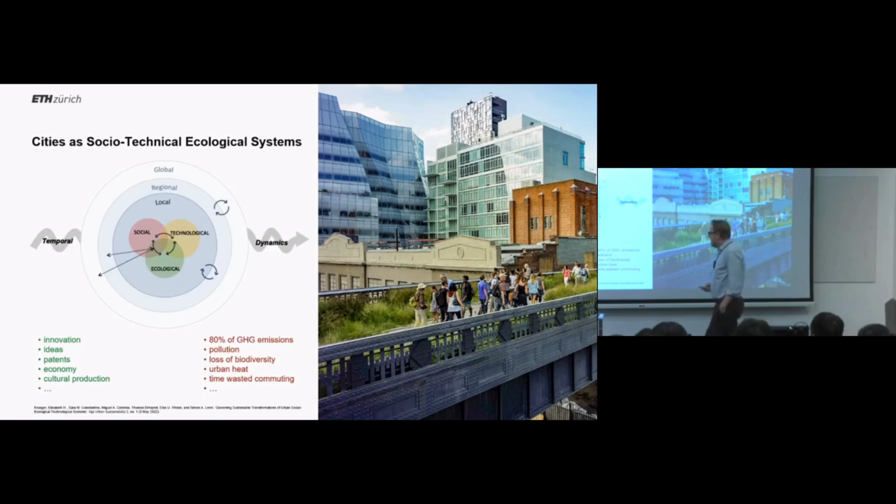NUS Cities has been pioneering research and discussion about complex cities as complex systems. Of course, if you look at urban science and complex systems research, we have learned that cities have very interesting, very positive traits. Cities boost innovation, they boost ideas, the number of patents, the economy, the cultural dimension. This is all something that is scaling extraordinarily in cities. We know that, and this is why cities are so exciting.

But we also know, maybe a little less, but we have to face it, the negative effects of cities. That is, of course, that also 80% of global greenhouse gas emissions are somewhat associated with urban regions. We have the issue of pollution that, despite our collective perception, is the number one source of artificial deaths on this globe. We have the question of loss of biodiversity. We have urban heat, which is pronounced by cities and their buildings, and time wasted commuting when we choose organizational forms that are very heavy on transportation and mobility.

So everything would be great if we just stop at the left side, but we also have to face the right side, and I think that makes it interesting. How can we think of cities where we keep the left side and even boost it, but not only mitigate the right side, not only make things less worse, but ideally create cities that in the future are maybe positive, even better than the surroundings, and that actually contribute to health, to well-being, and livability. This is kind of the frame I want to set with my talk today.

And it's not moving.

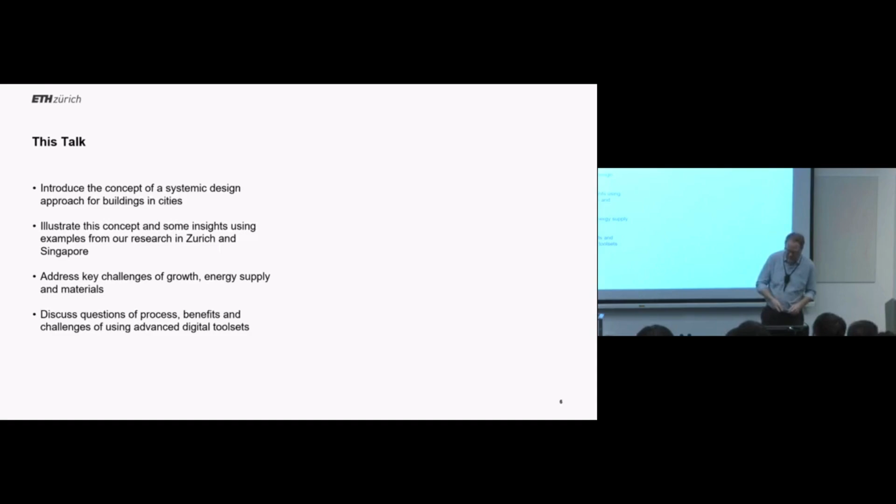So the key question for our research: how do we integrate different interacting domains in urban contexts to achieve a more holistic perspective? How do we generate and derive knowledge through science and evidence through application? How can this be used to design future cities that are not only less bad, but positive? That means hopefully better than the surroundings.

So our lens on this challenge hinges on 3 points. The first one, of course, we're all aware climate change is happening. This is no news, and we're all in the same picture. Most of you probably also know the contribution of buildings to this question.

Almost 40% of global greenhouse gas emissions are somewhat associated to buildings. What is interesting is that it can be distinguished between direct and indirect emissions through power consumption and maybe combustion in buildings themselves, but also in terms of material and resource consumption. So it is fair to say that buildings make the biggest part of global greenhouse gas emissions, and this is why we need to act.

So one goal definitely for us all needs to be to move towards low or even zero total carbon buildings, and I will later show an approach how we might go in this direction.

A second, similarly important, and in the past years due to the geopolitical crisis even somewhat more challenging point, is the question of facilitating the energy transition. Our society needs to change into renewable energy generation. It's quite interesting — this is the image of the Swiss Confederation, the plan until 2050.

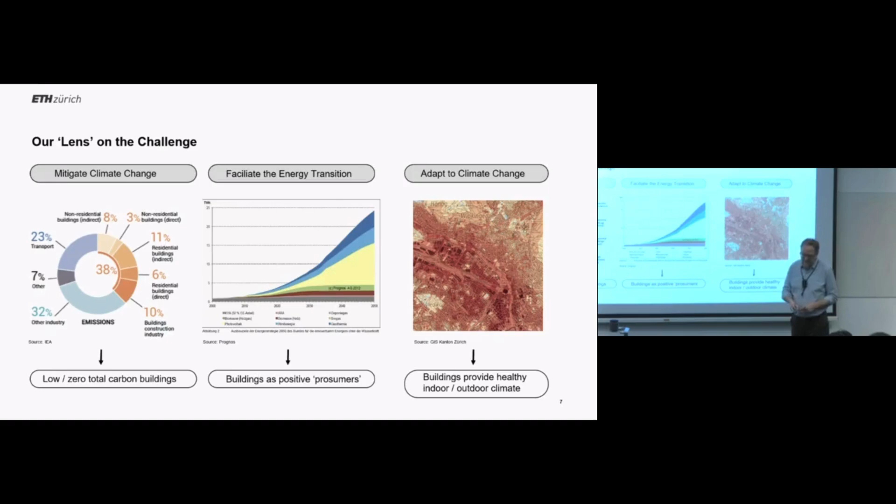What also makes it very interesting, and I believe we have a lot of architects in the room, when we started this topic, we tried to frame it and thought, okay, well, it's actually just about multiple buildings, right? It's maybe about a neighborhood.

But then when you start working on this, you see that there are all those interdependencies between the different temporal and spatial scales. So if I started with a building, I can look at it, but of course, immediately questions about the building components rise, and from the components, I have questions about the materials.

And right now, for example, materials research is very active, with new materials coming up. And if we trace the entire chain, we see that this actually trickles up, and I will show you an example how this can trickle up to the city scale, and vice versa.

What is a building? What is the difference between a building and a district and a neighborhood? It's, of course, all the intra and inter-building effects that happen on the district and neighborhood scale: exchange of radiation, shadowing, infrastructures, district cooling, district heating systems.

And then if I scale this up even once more, I end up in the city, and the city, of course, sets all the boundary conditions, the grid, the larger scale infrastructures, which immediately affect this and this level. So it's a tricky question, right?

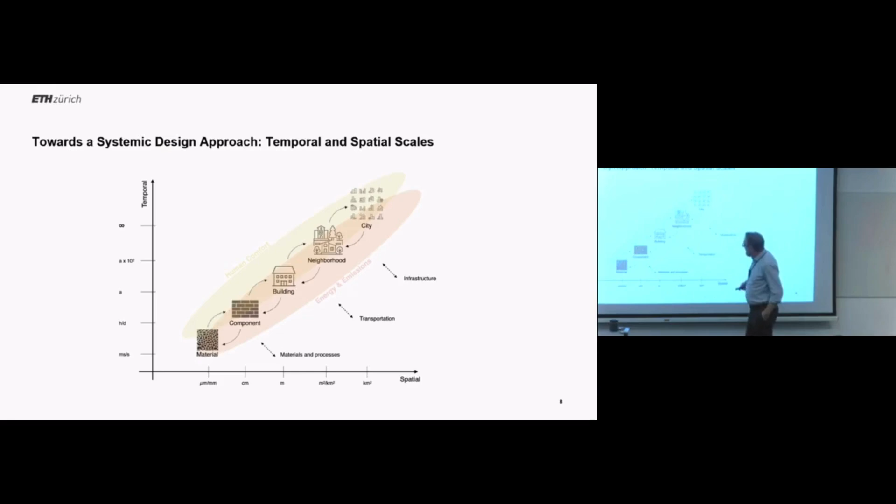It's a tricky question how we combine this in a way of understanding with respect to different spatial scales and temporal scales, as already mentioned initially.

So how are we trying to do this? We try to address both qualitative and quantitative, but I think the novelty is for us to introduce more quantitative means. And this happens by building computational models on top that are multi-scale and multi-domain.

So we try to build basically a selection of models that help us to isolate a question and maybe answer a specific question, or at least have an insight about the mechanics behind it. We all know all models are wrong, but some are helpful, right? As George Box, the statistician, has quoted, and I think that's very true.

For us, this means starting by working with stakeholders, starting to create scenarios. One way to predict the future, we don't know the future, but one way to at least have possible futures is to think about different scenarios. And none of those scenarios will be the future, but the scenarios might span a certain range where there are some elements that could be a potential future.

So it starts with interacting with stakeholders. This can be communities, this can be industry partners, this can be other domain specialists, starting to create the scenarios. And for those scenarios, we, as a next step, then try to gather input data that helps us populate the models that we build.

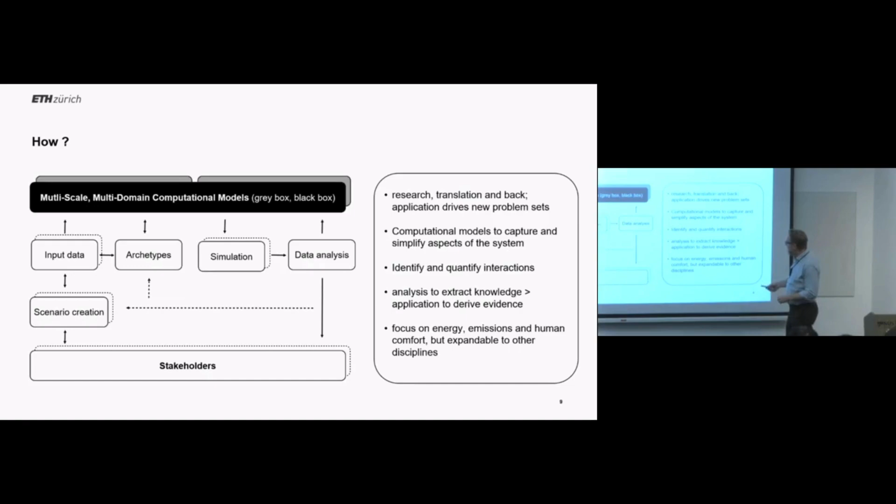As already mentioned, we want to extract knowledge, but then when we apply it, we want to derive evidence. We want to know that it's actually true, and that's quite tricky on an urban scale. Buildings you can measure and monitor, you can somewhat grasp as a system, but larger scale systems are really hard to get the ground truth for. How should we do that? This is an exciting part of research, and we had some interesting discussions today about that. And yeah, that's the specific focus I already talked about.

So, of course, that's the work of many people. I'm standing here and am allowed to tell the story, but there is, of course, a big team behind it. For 10 years, we've also been here in Singapore at the Future Cities Lab, with our collaborators from NUS and NTU, and many people that have been involved in this research are obviously a big part of that.

Good, let's start with the question of growth. A few years ago, there was one of the largest research projects in Switzerland that brought together different entities to think about how Switzerland would develop and how to decarbonize Switzerland. There were a lot of researchers on mechanical and energy systems behind it, but it was very unclear how Switzerland would even develop and what the future energy demand would be. Everyone was developing technologies, but the question was, okay, which type of energy are we talking about and how much do I need? So we started this project assessing the energy demand of future Swiss districts under urban development and climate change.

And that is already something that is essential. It's not only about assessing energy at a certain point in time, it's the question of how it changes. How does it change under urban development, assuming that Switzerland will grow, and under climate change, which is already happening. This is just one example: heat days will be rising in Switzerland too.

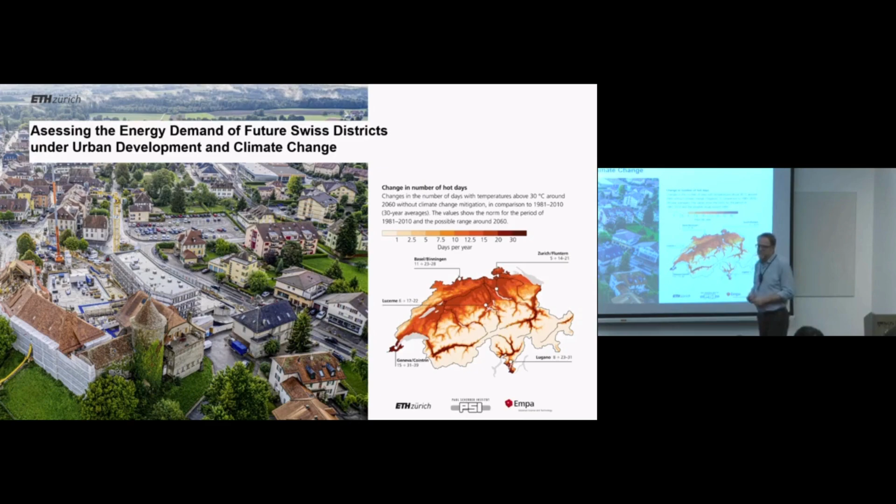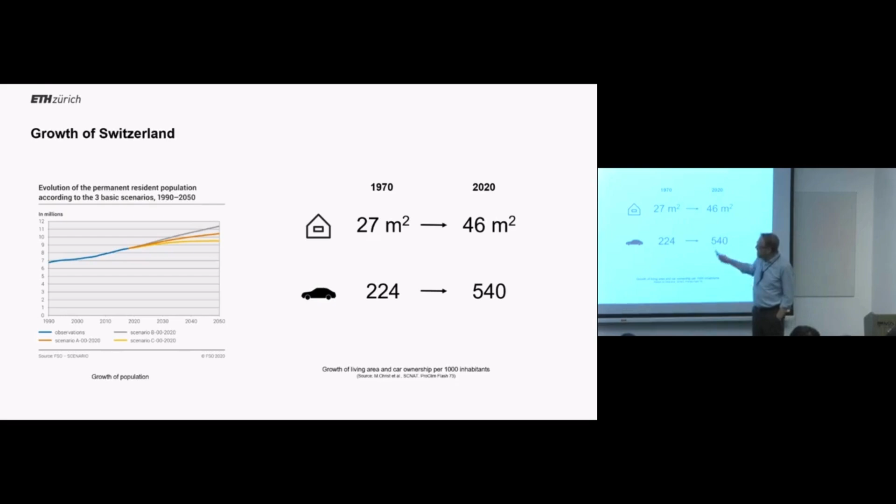But it's not only growth in people, it's also growth in space, right? In 1970, the average Swiss person had 27 square meters of living space. Now we're at 46 - that's almost double already. So each individual person requires an average of 46 square meters to be built. That's quite heavy, and this multiplies the fact that we need to house more people. But also in mobility, in 1970 it was a little bit more than 200 cars per 1,000 people. Now we are above 500 cars per 1,000 people. So all these factors multiply and it becomes essential how we deal with this in the future.

And of course, if you go to Singapore, cooling was always there, right? Buildings always needed to be cooled. And so there's been an adaptation in habits, in people, in building, in technology. But in Switzerland, this is not the case. We have building stock that is very old.

So 65% of residential buildings are older than 40 years. These are all buildings that were built and designed for a very different climate. Now we have this issue that with an increase of cooling and hot days, after a few days the cooling reservoir of the building is depleted, but there's no active cooling systems. So it means that in the future, our entire building stock is not really capable of dealing with the fact that we need cooling all of a sudden. So there's a huge problem.

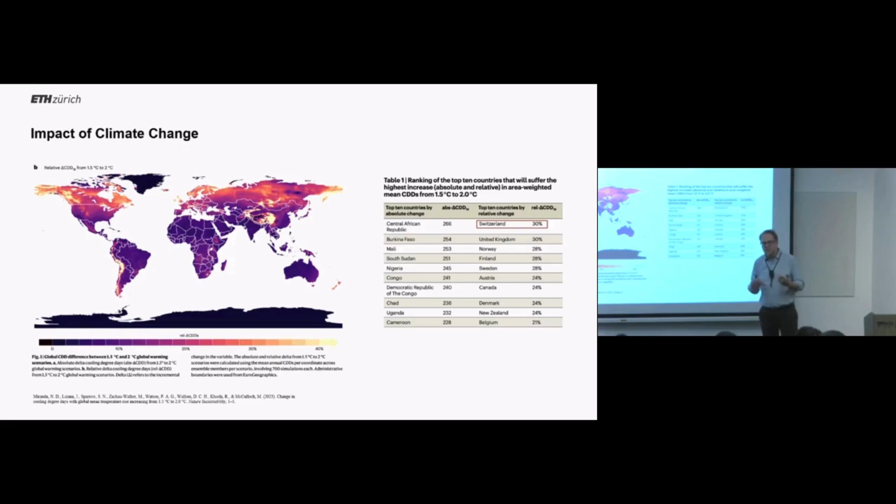How do we deal with cooling in Switzerland? So this is the project we then started. We looked at this idea of an archetype. We didn't just do it on a building level, we did it on a settlement level.

So we looked for representative Swiss archetypes, meaning we were looking for structures that were in their characterization representative of many situations in Switzerland. So here, for example, the urban archetype, that was an easy one. We were already working on Zurich Altstetten, which we have a lot of very good data on. This is the typical mid-dense, mid-rise Swiss city, and that serves really well as an archetype.

Then from the French part, we chose Echallens, which is roughly 1,000 buildings, kind of more a suburban, peri-urban archetype. And then, of course, a rural archetype, Airolo, which is a bigger village, a little bit up in the mountains. So these were our representatives.

And with those 3 communities, we had for 9 months conversations about their development and growth plans. How are they supposed to, and how are they planning for growth? Turns out that they really didn't have an idea. Well, Zurich has a URA, so to say, like in Singapore, called the Amt für Städtebau, which is trying to make plans how to cater for this.

But already in Echallens, they had one person in the community who kind of thought about urban planning. And then, of course, in a village it's all voluntary work, so they had no idea how they would develop. So we had long conversations to come up with certain development plans and development concepts. And this is the entire workflow that is behind it.

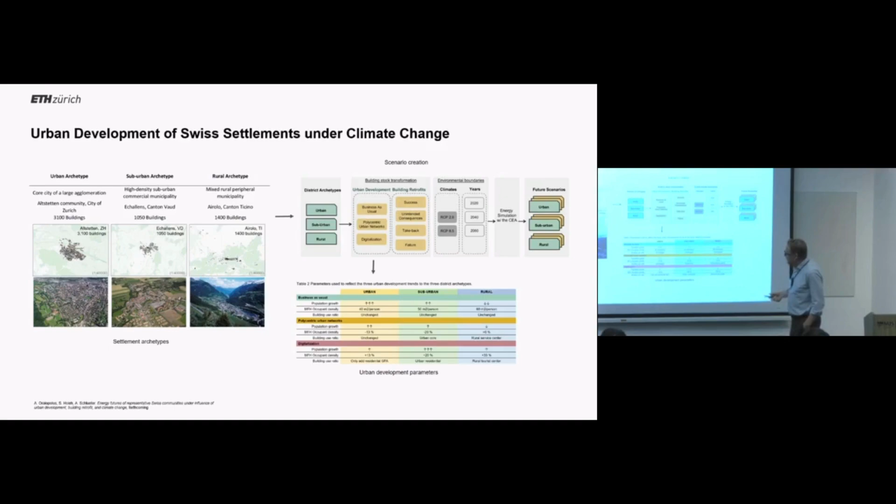And then we looked at this at different temporal scales. And the outcome is then a huge amount of scenarios and simulations, so 16,000 that were run in parallel to see what happens if I look at those different parameters.

Maybe just very quickly on the building retrofits. Of course, the building stock doesn't stay the same, it changes. So how does it change?

There were 4 different retrofit scenarios included, what would happen, and they are all parameterized. So the most important part is the retrofit rate, what percentage of square area would actually be retrofitted with different measures.

And then you see how those pan out in terms of growth of GFA versus population growth over the different years in the different scenarios. So in most scenarios, there's an increase, but it can work very differently.

For example, very clearly in the polycentric urban network, we have very distinct steps how the suburban areas have a much, much bigger increase, versus rural is more on the decline in the classical scenarios as it is right now. Versus then in digitalization, this might flip, and we might even have an increase in GFA there.

This then comes down to different use types. This is this diagram where we see how do the different use types change. On the urban, there's not so much change.

We can see here that in the suburban, there is a bigger share, for example, in office and commercial, because there will be more of this activity. And in the rural, of course, the only thing which actually changes is digitalization, where people would stay in their villages, or even more people would be in the villages, and then they would work there from there.

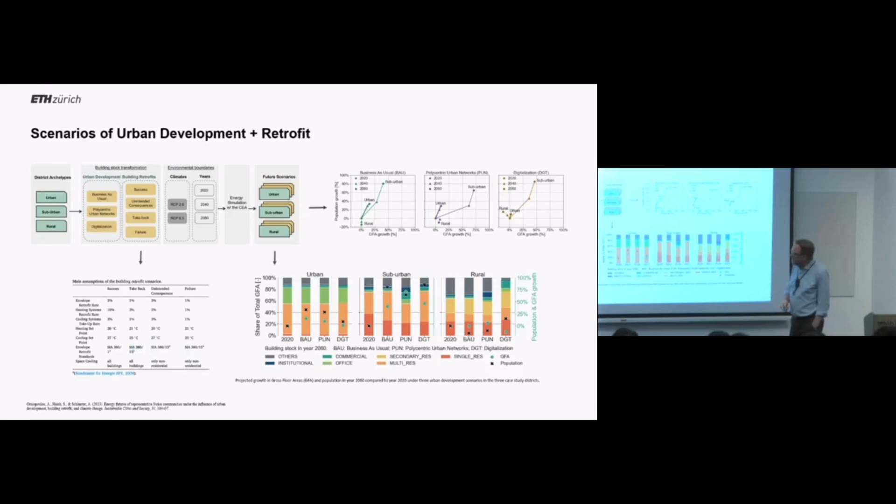So what comes out at the end is the questions of heating and cooling. And what is interesting here is not only the numbers, it's the trends that we see. So I will just quickly highlight those above.

Of course, heating, we see that in most cases we expect that the heating energy will decline. So there's less heating consumed, but it's highly subject to the scenario.

But then again, this entirely flips if you look at the suburban case. So our intuition would tell us, okay, everywhere the heating with climate change, so we need less heat. But of course, in the suburban, that changes due to the fact of a change in building typologies and a growth perspective.

And you see a similar effect in cooling, that you have a very, very dependent on the scenarios, a moderate increase or a very sharp increase in cooling energy demand.

And that tells you that basically if you plan for energy systems or any change in terms of infrastructure, then of course it plays a big, big role which scenario you actually look at. And you might be planning something that is then obsolete or not sufficient at this specific places.

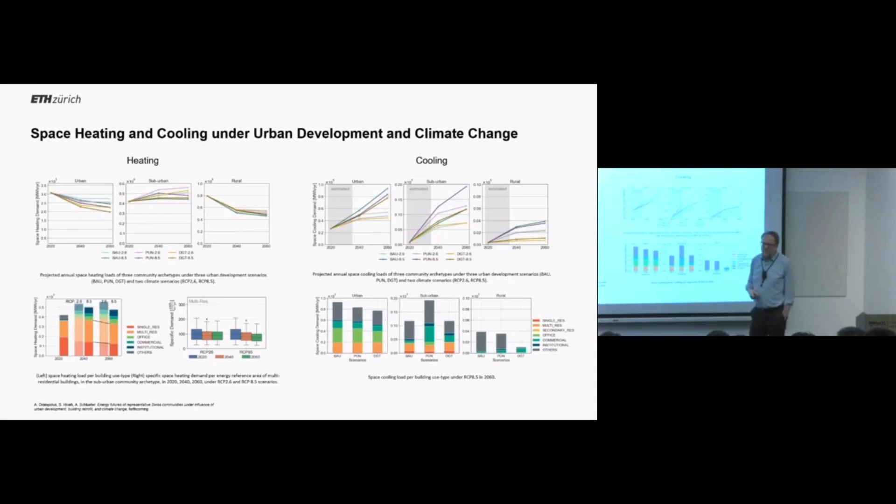We also see the different mix that is then established in the different archetypes and different settlement systems, with the biggest change in suburban. So that's maybe one learning, that the suburban from this is the point where things need to be much more detailed and much more specific.

And this is, if I would need to combine and collect the insights from this, urban areas face a rising demand for space cooling because of retrofit and climate change. And this is interesting, potentially matching space heating demand in 2060. So we're actually for the first time on the same level, heating and cooling.

Suburban areas exhibit a high variability, and this variability and the growth in floor space might have a negative feedback on energy saving and retrofit measures with a high planning uncertainty. Rural areas, rural communities are more stable.

It is actually the biggest driver on the different factors, and especially on the cooling energy demand, is the non-residential buildings. That's also an interesting insight for us.

What was most worrying is that the current slow pace of retrofitting and replacement of heating and cooling systems per se is insufficient to reach the energy targets that Switzerland has set for itself. And this you can see from just looking at those three archetypes.

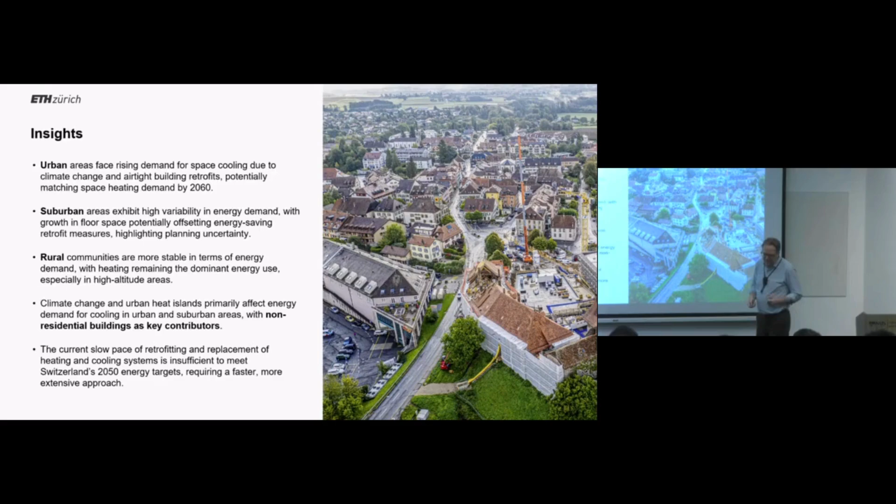So a second very different case study in a very different context was in Navi Mumbai, but also with respect to the question of growth.

The main question here was, can we scale up, can we utilize these methods in a very different context, where we don't have all this fantastic data, where the stakeholders and systems work very differently? So if we do this fantastic research, is this only applicable to first world, high finance, high data availability contexts, or could this be applied essentially anywhere? This was the question here.

For this, we teamed up with a local team: Assistant Professor Chirag Deb at IIT, who's actually an NUS graduate and worked in my group in Zurich before becoming assistant professor there. Together with local stakeholders, CIDCO, the City and Industrial Development Corporation of Maharashtra, the state where Navi Mumbai is located, we selected this area as an example, asking would we be able to project the development and different development trajectories of this area.

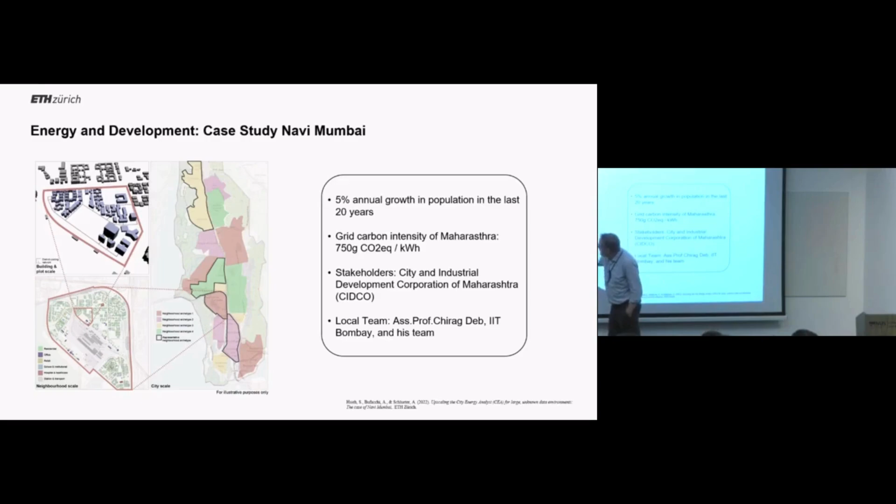This is where we cut it out. This is one section of Navi Mumbai, and this is the closer district. We took this smaller district as an example to model. The whole idea was, would we even gather enough input data, and could we even have a stakeholder-driven process in this? So this was the team.

It worked for the first time with a remote team. Three people up here were the remote team, basically giving support and training, and those were the people on the ground: Chirag and his 2 students, a PhD and a master's student. Within 3 months, the aim was to come to actionable information where local stakeholders could actually take decisions.

Very sporty, but the idea was that there's a remote team that trains the local students who act as change agents that help understand the situation. If we would go to Navi Mumbai ourselves, it would take us a year to understand what is even happening. Those people are very knowledgeable, so we would train them in using this tool set.

This is the City Energy Analyst, one of our tools. I'll tell a bit more about that later. They would get training in this environment, start gathering data, consult owners, developers and stakeholders, then pitch this and discuss it with the municipality, and ideally infuse this information into their design and development process, which happened to a certain degree, on different levels of control, let's put it that way.

The idea behind that is we issued the CEA as a digital public good, an initiative by the United Nations stating that there are digital goods that should be available for everyone. It's an open source tool, so this was basically our first tryout to see what would happen if we did that.

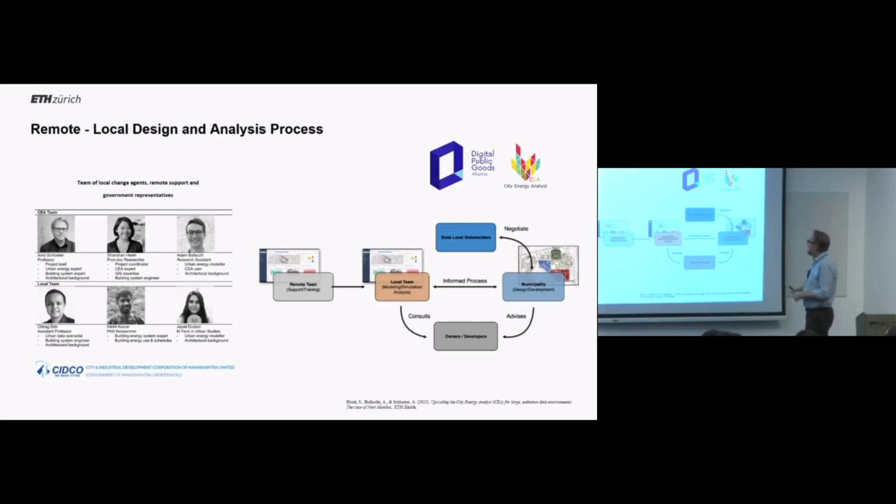It's quite interesting, I mentioned before, if you want to do this, you need data. If you don't have data, you cannot model anything. Even though we have a pretty lean system, we only knew this part, we knew Switzerland. Switzerland is very convenient, you have a lot of data on urban aspects from the government, it's all publicly available. Then you have open source like OpenStreetMap, construction databases, and all those label and certification systems that give you this data. So this is all nice, our data world is nice in Switzerland.

The question was, what would happen if I took this into a data scarce environment? Could I even utilize these tools? So the first 6 weeks, the 2 students looked intensely into the different data, and they were able to uncover quite a bit, which was really interesting.

There's still OpenStreetMap, for example, which is open source data, but there are also different regulations and adjacent research. But there also remained black data gaps where we were not able to obtain sufficient information, and we had to take educated assumptions on how we put this into the models. Overall we were very positively surprised, we thought it's data scarce, but it's actually not data scarce, it's data diverse. You have just a lot of different data and need to search a little more, but there's actually quite a bit around, even for Navi Mumbai.

So in 6 weeks they gathered this data and ran different simulations for the city quad in Navi Mumbai, and the first thing they tested was a kind of benchmarking: are the buildings we're looking at actually within the larger research and measurements of Navi Mumbai? That was good, we had quite a good fit overall, except the high-income residential, which was way above what we expected. That's because there are some buildings that are very luxurious, even going higher than originally intended, so there were some glitches in the planning that happened.

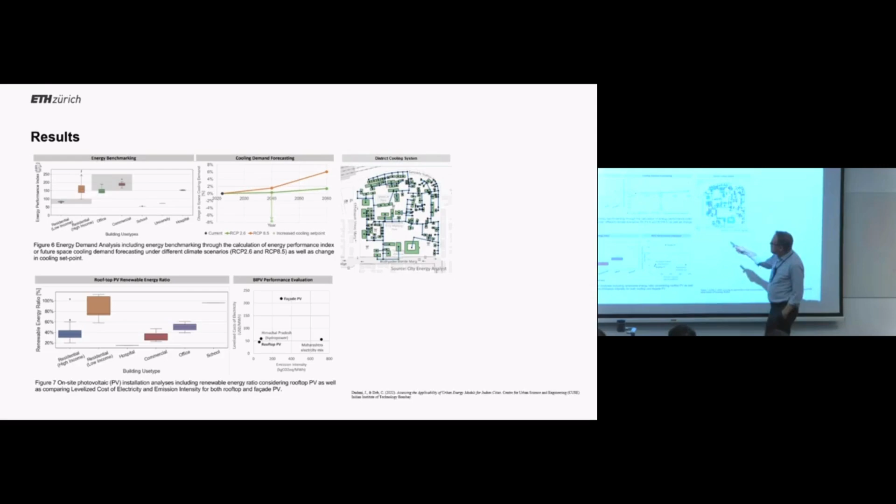Here you see the electricity grid at 750, and you see this is where rooftop PV is, somewhat around 55 to 60. Even in both emissions and costs, it's actually something that would be cost competitive over the lifetime - if you think about 25 years of using solar. If you do this on a facade, which we also investigated, then this is not very cost competitive, obviously, in this surrounding. But there is a huge potential already now to decarbonize by renewable energy in this system as we have it right now.

So what was the learning for us? Yes, you can do those things also with scarce and diverse data. It's a more effort to compile data sets to actually do that. This idea of local stakeholders as change agents was very interesting.

We've now replicated this idea to Brazil. Next week, there will be a master student who has a dual appointment as a student and working in local government, and she's doing the same exercise for two cities in Brazil. So this idea of having knowledgeable experts in this environment as change agents seems to be a way this could actually be spread. It doesn't influence data availability, it doesn't necessarily influence the approach - the whole UBEM, urban building energy modeling approach - but it's a question of scale, maybe, and the difference in models you choose.

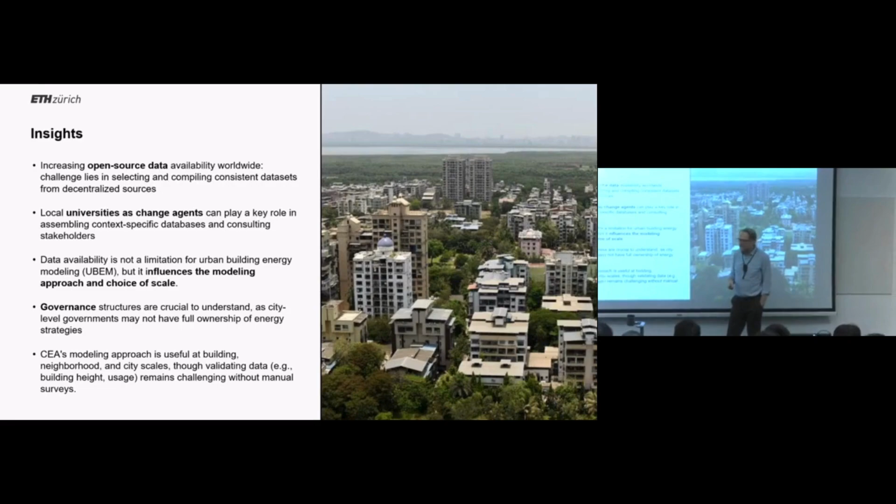At the end, we were not successful, right? That's maybe the bad part. And this is mainly because governance and governance structures you cannot understand in 3 months. So we were not able to really understand how the different decisions were made. We learned that the city-level governments had not really full ownership - even though they were responsible for the planning, they were not responsible for all questions related to energy development. So it would have had to go up a level, to a state level. But we had some very, very interesting feedback to that.

And what we also learned is, yes, we can have diverse data, but there's a high degree of uncertainty still. In the future, we need to go to such places and also do surveying - for example, measuring how high the buildings actually are, or at least gathering information. So manual surveying would have increased the quality of data significantly, but of course within 3 months that was not really possible. So that was an interesting learning, and since then we are trying to replicate this to very different locations.

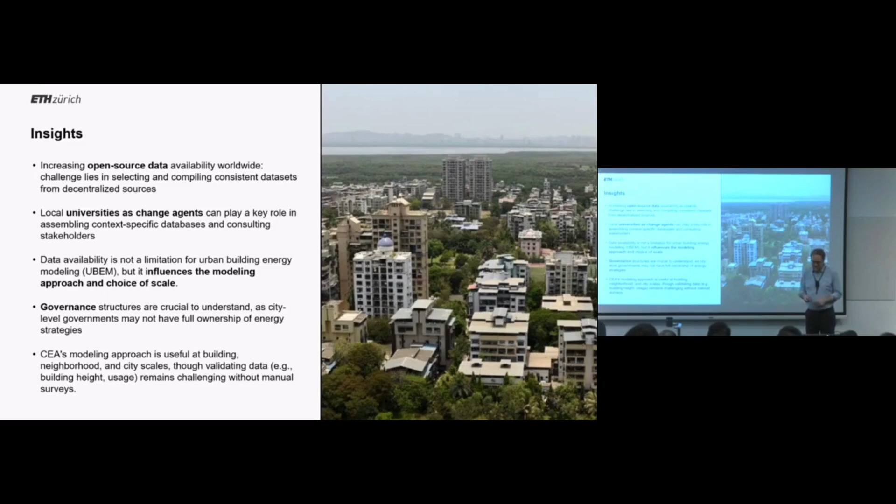We are already in the topic, so the next question is of power. We already saw renewable energy as a point, and this is what we're doing at the Future Cities Lab for 4 years - Powering the City is actually the module, how it's called. The question here is: what is the impact of renewable energy? If we think about urban photovoltaics, what does that mean? And of course, yes, we know these facts. This is, by the way, a great study that looks at 167 cities in terms of carbon emission tracking and what the different contributors to carbon emissions are in those cities.

If you just look at the bottom three rows, we see that buildings are massively part of those carbon emissions, which we already know from the beginning, but it's interesting to see how much that actually makes for different cities across the world.

What is also interesting, and this comes again to the level of governance, is that local governments are the drivers of these efforts. According to the Renewable Energy Status Report, over 920 municipal governments have implemented regulatory policies, financial and fiscal incentives, or indirect support policies to decarbonize buildings through renewable power. That is interesting for us. We see an interesting potential, and we want to know how does that impact the way how we think about cities.

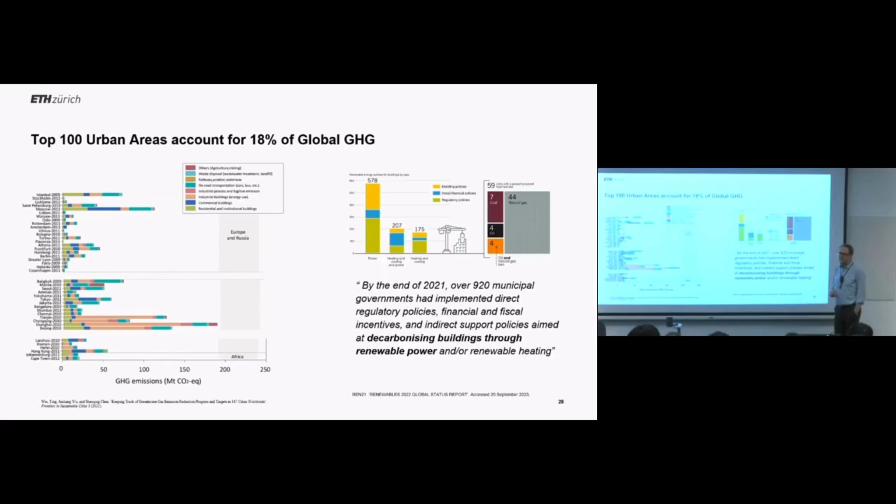I showed this: the carbon intensity of the grid. If you compare this to the carbon intensity of photovoltaics at the latest iteration—this is data from Switzerland from just 1.5 years ago—we see the carbon content of a monosilicon crystalline cell is 42.5 grams. Then, of course, you need to add maybe 25-30% for the entire construction, so you end up at maybe 70-75 grams. If you look at what the world actually does in terms of grid emissions, this would be maybe this color range here, and you see there are actually very few countries that could beat that.

This means on 90% of this globe, photovoltaics would definitely be a more ecological option than taking electricity from the grid. The only reason this doesn't happen is for countries that are already quite fully decarbonized, the Scandinavian countries, Norway for example. Switzerland is at the borderline. Because if you drop below this content of carbon emissions, it doesn't make sense to produce by photovoltaics, because your carbon imprint will be higher. But you can say 90% plus is still affected by this, so a lot of cities could benefit from using photovoltaics.

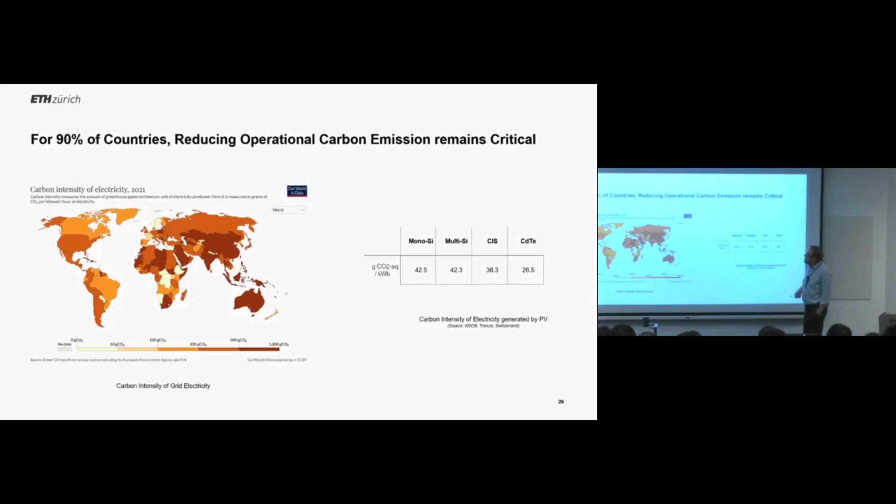We've done a lot of research also on the building scale, on building integrated photovoltaics, and there's quite some misunderstanding about what that actually is. I had this over the years, always in discussions, and I tried to formulate and define it with the help of the International Energy Agency, of the PV task, and I think that's important.

A BIPV module is a PV module and a construction product together, designed to be a component of a building. Or, negatively defined: if a BIPV product is dismounted, it would have to be replaced by an appropriate construction product. So it's not that you put some PV over a rooftop, where you say 'hey, I have a roof, and then I'm putting up some canopy, and then there's PV on top.' It's really an essential part of the building.

This becomes interesting, and I'll explain why in a minute, but this is an example of one building in Zurich where you see this entire facade is basically made from photovoltaic modules—it has become the photovoltaic skin. It's a skin that is energy generating, and you see how this looks underneath: there's basically the raw roof behind, and this is the outer layer. So very clearly, you don't need a roof cladding, you don't need a facade cladding at this building, because you have an energy generating cladding.

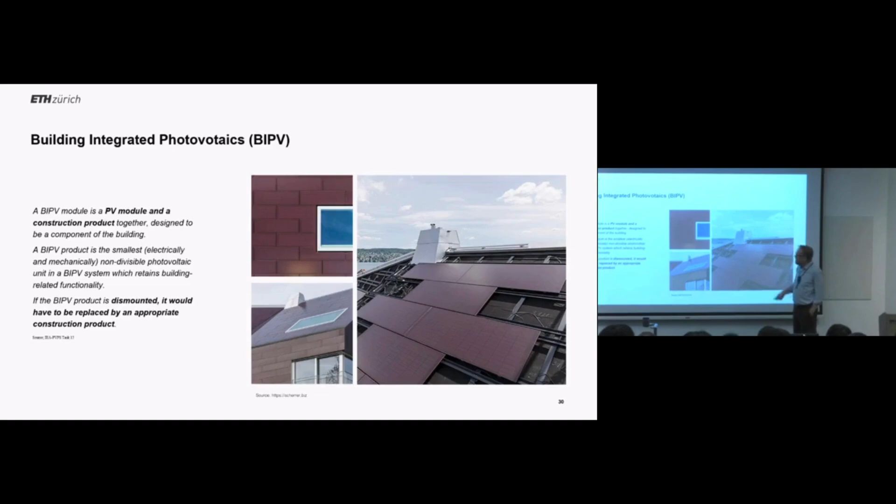Now you could say, that's not a good idea, that's way too expensive, right? Why should we do that? And it's quite interesting that the perception of that is very different from the reality.

This is recent research on European countries, and it depends on how you frame it, as always. But if you frame it so that a photovoltaic module means you're replacing a construction component, it also means you can put this into the income breakdown. So you have money you can generate by photovoltaic electricity generation, very clear. But then you have the savings from the envelope costs—you're not building a roof, you're not building a facade, you just have this module. And then there are other small impacts on your cost and income breakdown.

If you take this as your boundary, you can see that in almost every country in the European Union, the levelized cost of energy—the price of a kilowatt hour of energy generated—is actually lower than if I would take it from the grid over its lifetime of 25 years. So against our understanding that this is a really expensive solution, we see there are solutions where we actually come up with lower costs for energy than if we would just take this from the grid. I think this is really interesting because it becomes an economic perspective.

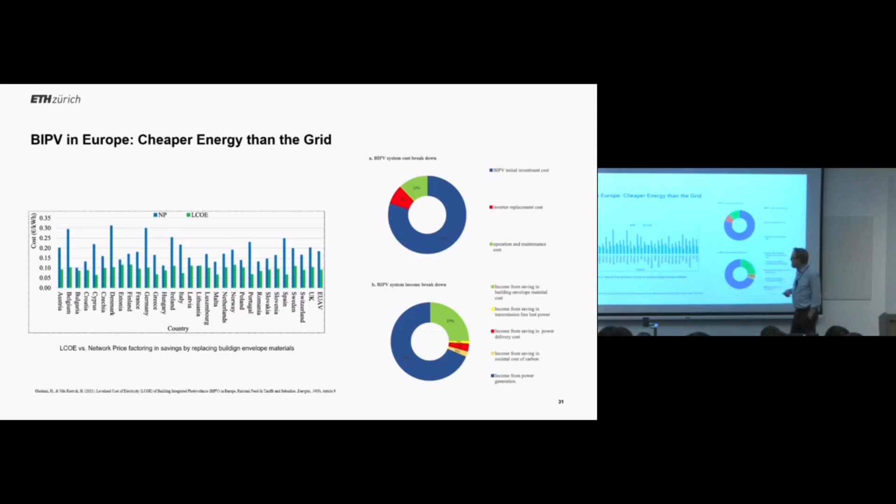The immediate question then is, okay, how much? If I would do this in the city, what would I achieve? There's one important number that becomes really relevant, and this is the irradiation threshold.

So the question is, how many kilowatt hours per square meter does a surface receive in an urban setting? Think of a facade, you have the angle, the overshadowing of buildings, the north exposure where in our climates there's not much or no direct sunlight. Then the question is, what is this threshold to place photovoltaics?

If you say, okay, this is actually 1,200, then I don't put it anywhere because no surface in the city achieves more radiation than 1,200. But if I start to go down, 800 for example, this is for sure the roof, but then it's also the south facade. Then it becomes already more, and you see this typical generation profile in moderate climates, less in winter, more in summer.

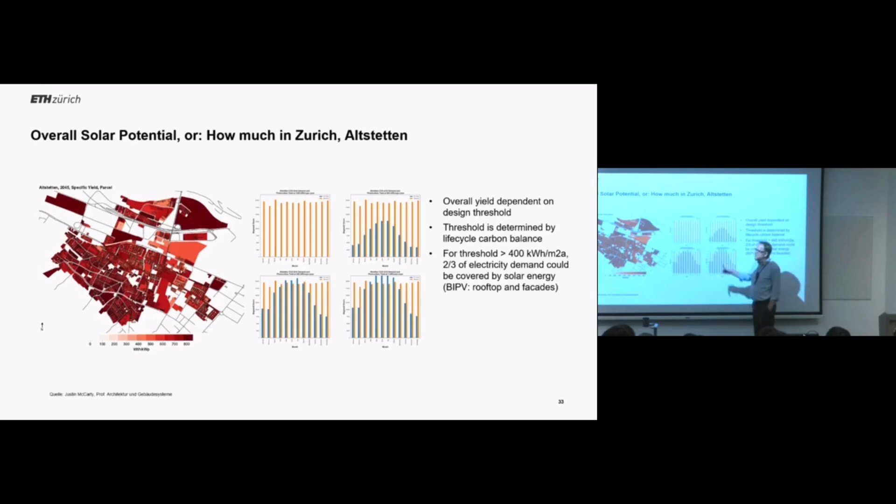But the interesting part is if I even lower that, so if I say 400 kilowatt hours per square meter, which means most of the facades except the north facade, I see that I'm already in a pretty interesting range. This is again using the City Energy Analyst, simulating this entire city quarter for its energy demand, which is pretty stable, and then simulating the PV generation with this irradiation threshold. It's already very interesting, if I would utilize the surface areas available above 400 kilowatt hours per square meter, I would have a significant contribution to the energy consumption in the city.

Now what the colleagues did is put this in two different trajectories. You can say, well, I do this environmentally optimal, or I do this cost optimal. These are two different perspectives. Most people from economy would say, let's do this cost optimal, right? We don't want to spend more money than that. And of course, cost optimal means there's a certain learning curve, these systems might be affordable, but for sure they will get cheaper because there's a learning curve and it will scale up.

If I do this environmentally optimal, I'm trying to replace as fast as possible because the grid carbon content will go down. Everything I do now will be immediately beneficial. Everything I do in 10 years, I'm already fighting against a lower grid content. Then it's interesting to see this kind of optimization strategy where I take two different lenses on this problem. This is how this then works.

You basically dissect the city into different surfaces that receive radiation. There's a radiation model behind it. And then you can see if you go for these strategies, the optimal strategies cover almost all rooftops, that's very clear. But they also cover a big part of the south facades, almost all covered, and then to a large degree the east and west facades, nearer to the south. So this takes into account all the urban parameters such as overshadowing and all these different things.

If you see the different strategies and look at the carbon optimal, it rises very quick, you should do this fast, you should do this now. By '25, you already go to a high capacity and then stay stable. Versus if you look at the cost optimal, there's a certain delay because you're trying to hinge on this learning curve, and later it scales up, but still it goes pretty high pretty quick, which is clear when we look at the cost I showed before. It's already important, it's already available in terms of cost.

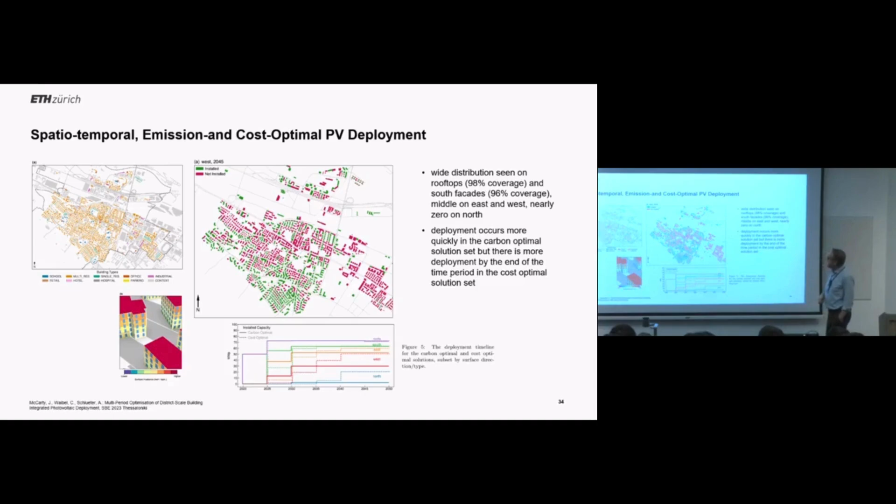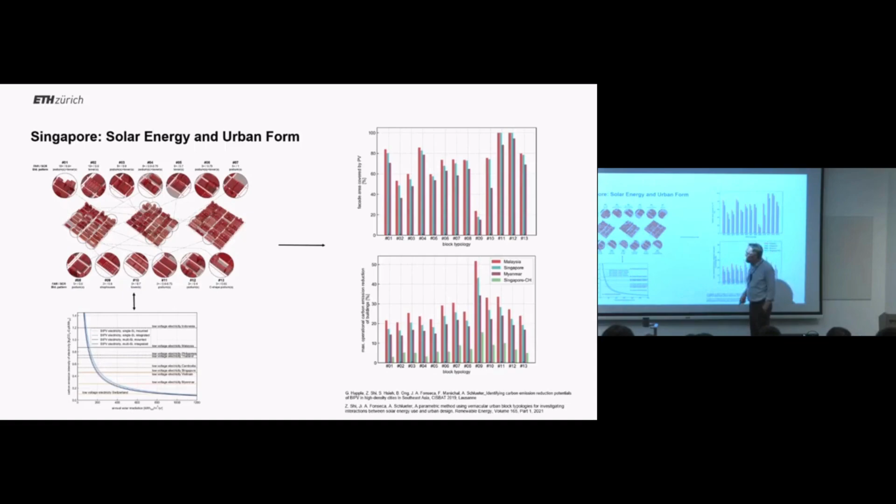And last but not least, the question is, okay, now I generate all this electricity. This is great. What should I do with it? Everyone knows that, unfortunately, we use electricity when the sun is not shining, so in the evening times, and then I can have as much solar generation as I want. So it's a question of storage. And this is what the colleagues in a work package of our Powering the City module actually looked into. So this idea that electric vehicles could become a rolling storage for this renewable energy that is generated. That's not a new idea, it's been around for a while. It has not really worked for a long time because the cars and this kind of bidirectional charging was not ready.

But this is actually demonstrated. We visited with our module in Switzerland, where this is in place, where people can hire, can rent these kind of electric mobiles that do this bidirectional charging. They take solar energy that is generated on the rooftops, store it, and then they feed it back into the grid or into the building if they need to. So it becomes a rolling storage, and you combine two different things, questions of mobility and questions of renewable energy generation.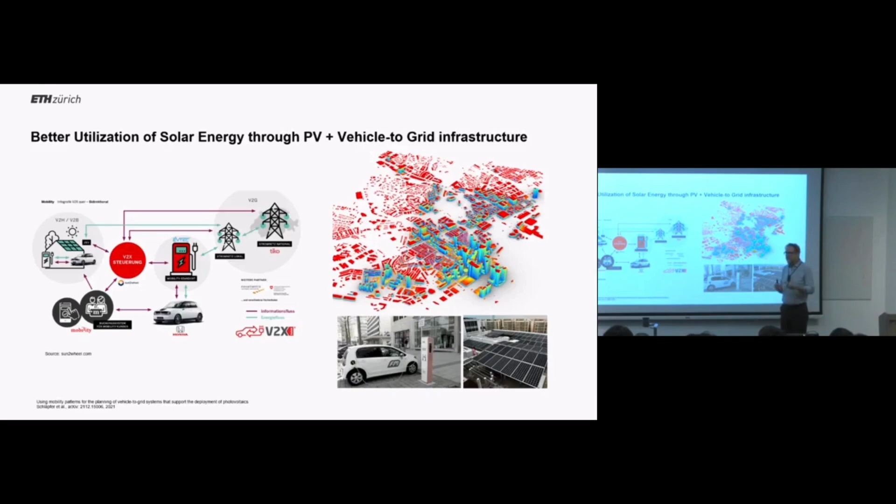So we looked at that also for Singapore, and the colleagues did, I think, something very innovative. They used large amounts of mobile phone data to look into this and to create kind of travel patterns, assuming a certain penetration rate of electric vehicles. They basically generated certain location profiles derived from this mobility data, showing where people would actually go with their car and where they would stop and how long they would stop there. And then they assumed a certain state of charge. So if you're longer at a certain location, then your EV starts charging and you can actually load up solar electricity. And then when you use it or you go somewhere else, where electricity is needed, you discharge.

And then it's quite interesting as a game to see, okay, well, how much could this actually contribute to different planning areas of Singapore? And here it's very interesting to see that, of course, a place where a lot of cars go in a fully charged state, for example, in the evening, they could contribute to the local energy supply. And this you see by the color shading. Some areas are not really getting any because the cars move there in an unfortunate period of time. But if you look at the different planning areas and you see the share, then in this very simple model, first estimation, we can see that there is a significant amount of local energy coverage through electricity that has been created by renewables and stored in electric vehicles, and they could actually add to the energy supply of those different city quarters. So again, a very interesting link between different sectors, energy generation, construction, how people move in a city, and how they utilize these type of technologies.

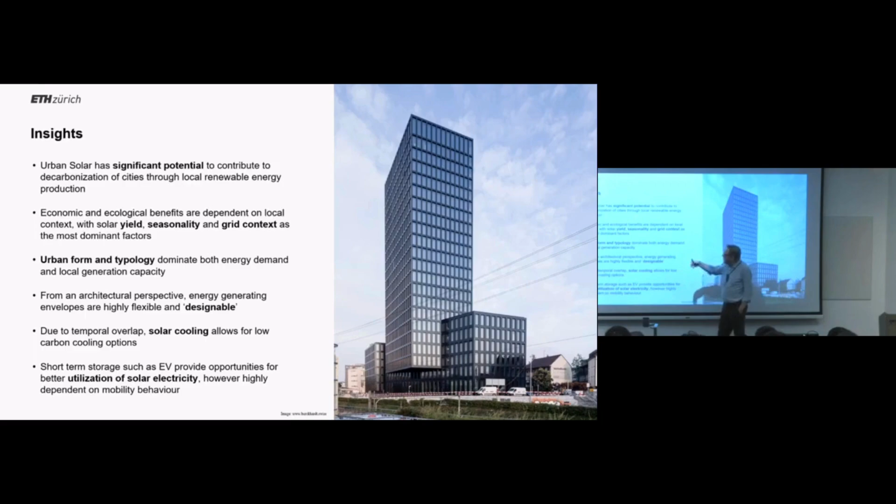If you look at the price drop of solar, it's already the cheapest form of energy generation. The question is, will it become this also in urban context? What we can see is that all those benefits, economic and ecological, are very dependent on local context, the city—yield, solar availability, seasonality and grid context being the most dominant factors.

So it's very specific. Urban form and typology dominate both energy demand and local generation capacity, on both ends, the building as prosumer. What is very interesting for us as architects, I think, is that PV becomes designable.

This is the first solar tower in Switzerland, actually built 15 years ago. This is an entire solar facade—every black panel you see here is a solar module. They try to really push it, and of course it has implications on design. But this was one of the first high-rises completely clad in photovoltaics.

And this is just one example. There's a lot of options to design solar these days. I'm at the Department of Architecture, so I have to defend that a lot and discuss the ugliness versus the beauty of solar. But I think that's not an excuse anymore.

There's interesting temporal overlaps. The next thing we're trying to look into is solar cooling—how to use solar for cooling purposes. And as already mentioned, there are interesting options to utilize other developments, such as electric vehicles, to improve utilization of solar energy by using them as storage. There are some technical and economic constraints, but we now see demonstrators where this actually works. So it's worth looking at.

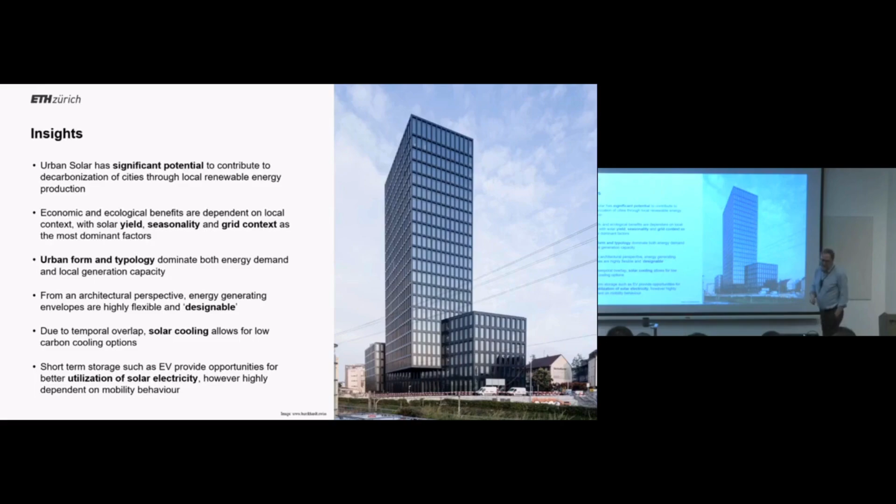Last but not least, I want to talk about materials. This is a shorter input because it's a new field of our research. We talked a lot about operational carbon—what it means to reduce carbon emissions through the operation of buildings. What about materials? We know that the better our buildings get, the higher the fraction of embodied carbon gets.

We also know there are a lot of options around, but how does that scale? Again, this question—how does it scale? I very much like this image, which is from colleagues, showing that in the past we relied on terrestrial carbon forming over millions of years. This is what we've dug out over the past 270 years.

And 270 years—this has become, of course, our fossil fuels, but also all our construction materials. So this idea that we're actually depleting a certain carbon storage. We need to reverse this and find ways to deal with carbon pool replenishment, and I think that's a fascinating idea. Buildings, as the things that need the most material, are number one in actually doing that. And there's a lot of development.

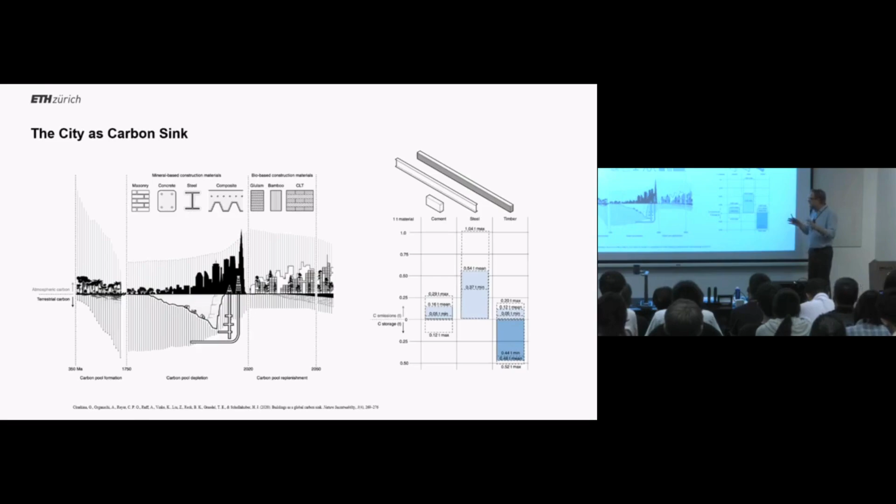Of course, I'm super simplifying that, because there's a lot of research on how deforestation and forest management affect what this carbon storage potential can be. You have examples where, if you use bad ways of forestation and deforestation, the carbon content of timber actually becomes worse than concrete. So like anything in research, it depends. But if you do it well, there's of course an interesting potential.

We're still in this very interesting research project with our colleagues from material science that develop carbon negative materials. The idea is that a material in their process is actually taking up more carbon than it is needed to produce it. Biochar is one example. It's a pyrolysis process where at the end you have a negative carbon balance, so this material actually sucks up more carbon. Of course, it's an interesting perspective.

All of a sudden we want to reverse, right? We want to use more material, not less material, because we potentially could remove carbon from the atmosphere and package this in these type of products and materials. Of course, there's a lot of ifs and buts, right? Economic viability is one question, durability, all those things. Just imagine the construction materials we use today, they have at least 50 years of advantage in optimizing a product. If you take an EPS foam, for example, there's been literally 50 years of optimization into it. Now we come with these type of materials, 0 years of optimization.

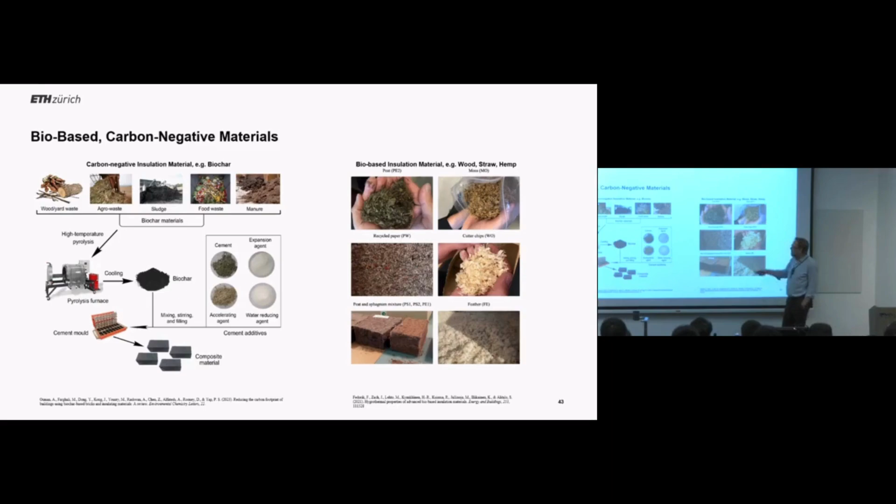So it's still a long way to go. The other part is bio-based insulation, which is very interesting: hemp, straw, recycled paper, cellulose, all those things. Those are quite interesting. Maybe not in a Singaporean context, because most of them are quite sensitive to humidity. But I mean, in general, as a general perspective.

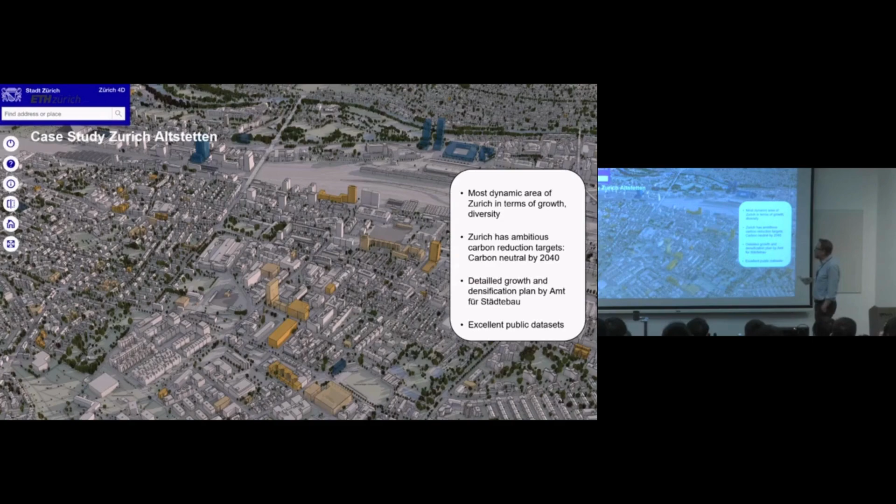So this is Altstetten, the most dynamic part of Zurich. It's interesting, Zurich has very ambitious carbon reduction targets, way beyond just operational carbon. And of course, for us, it's great because it has excellent data sets, right? A lot of public data sets available that helps us to develop new methods which we utilize in this. So this is Altstetten, a part of Zurich.

And now, okay, we need to retrofit. This is very clear. So what would happen if we would retrofit with bio-negative, carbon negative, or bio-based materials? How would this work? So we analyzed the city quarter about the building age, looking into the databases of the retrofit state and building age, and came up basically with a kind of rational retrofit process.

So what would happen if we would address the buildings by age and have subsequent retrofit of this building stock? You can see here, as I mentioned, there's a big part that is older than 60 years, so very prone to retrofit. But there's also quite some new buildings that, of course, still run on the sources they have right now, and it will take at least 25 more years until they get a heavy retrofit.

Then we create those archetypes. This time it's archetypes on the construction component level, so not from districts, but archetypes now on the component level. And then, of course, again, you build scenarios: the business as usual with a certain retrofit rate. This is the official governmental plan, Swiss energy transition. Retrofit rate of double, this is realistic. It's below 1% actually, 1.9% Swiss energy transition.

And then what would happen if we want to electrify all buildings by 2040, so decarbonize all buildings? We would need to have at least a retrofit of 3.4%, right? So this is very much connected.

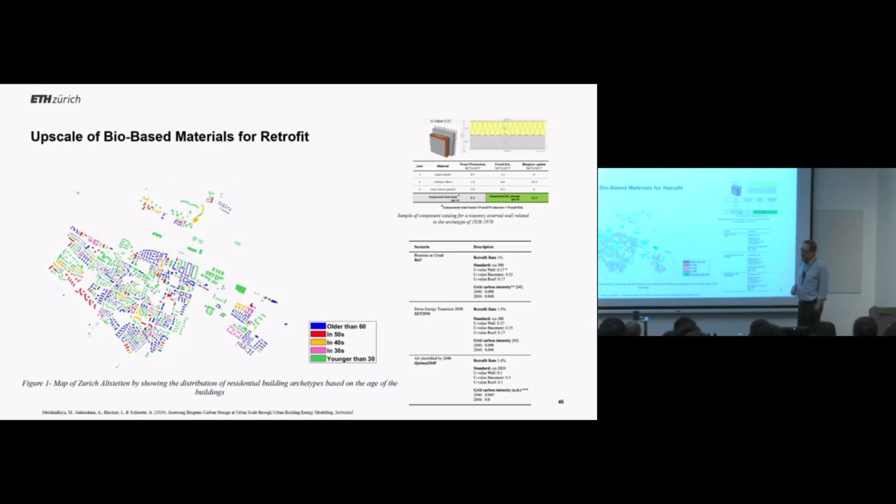So what would happen if we take these different scenarios and we say, okay, we do this with bio-based and bio-negative materials? What would the contribution be? You see this is the optimal scenario, the high retrofit rate of 3.4%, and the carbon storage potential of different buildings. You see a lot somewhat in the low and the middle, and then some buildings that have larger development potential have quite some carbon storage potential per year.

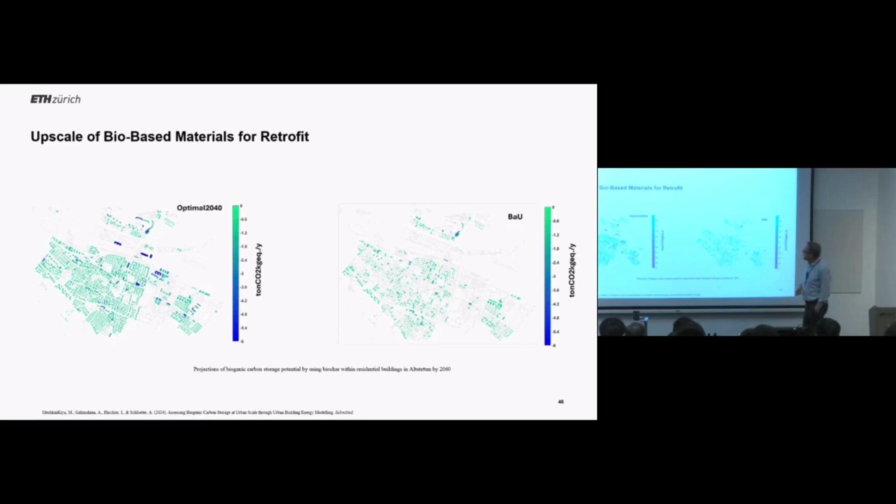And if we take the standard retrofit rate, we see, yeah, there is a certain potential, but it's actually not so pronounced. You see only a few buildings have a smaller carbon uptake, carbon storage potential. And here we see two things: if we take different components, for example wall, roof, and floor, then it's very clear that the walls have the most interesting potential, at least for this biochar, which is an insulation material.

It makes sense that the wall is more interesting, but it's very prone to the bio-based material versus carbon negative distinction. Bio-based material is only a temporal carbon storage because you release carbon after its lifetime—clear if you burn wood afterwards, your carbon is emitted after usage. So you're only temporarily storing, versus a material such as biochar which actively stores carbon. It has a higher carbon imprint in producing, but is able to store more.

You see how this enormously scales with the retrofit rate that we actually have. If we do everything like we do now, nothing happens—there's not much impact even if we have the nicest materials. It only comes in combination with a higher retrofit rate that makes this very interesting.

Another interesting insight for us was, well, materials are of course very important, but the building stock is already there. We need to retrofit it over a very long period of time, which means the carbon balance only rises slowly versus buildings which already consume operational carbon now. They emit operational carbon, so even if I take the most ambitious rate, 3.4%, it still takes roughly 20 years until we balance out the operational carbon emissions versus the embodied carbon emissions.

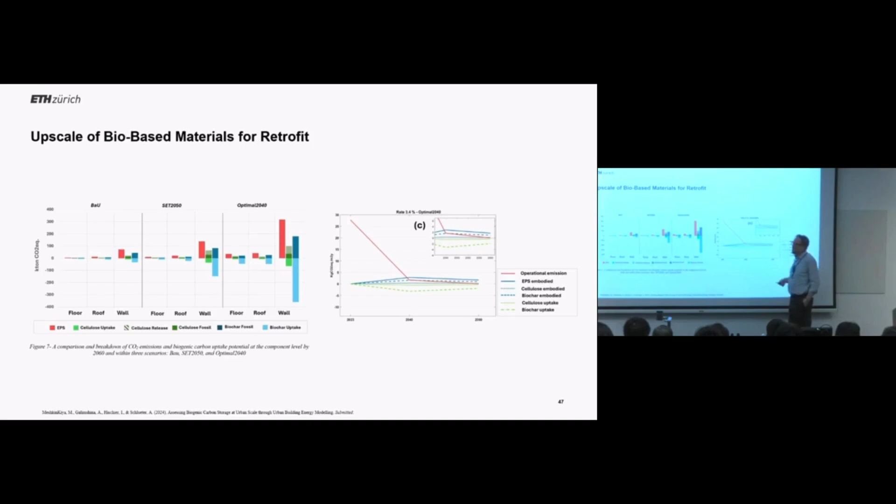What is missing in this perspective is that the carbon negative material is only part of a lot of materials—an insulation is just one part of a building assembly. So we're only looking at this part versus all the other emissions that appear with facades, windows, and all this other stuff. This is again an isolated perspective.

It's a first view, I would say, but it already shows us very logically that the operational emissions still become dominant, or are still dominant, until a certain time when the grid is decarbonized or the buildings are decarbonized. If we take a very ambitious scenario, we can break even at a certain time—2040 maybe, in this example, with a lot of assumptions—could also be 2050.

Biochar is interesting as a material because it offers a much larger carbon storage potential compared to bio-based materials. But as already mentioned, if the retrofit rate remains low, there's not much impact we will have from even those more advanced materials.

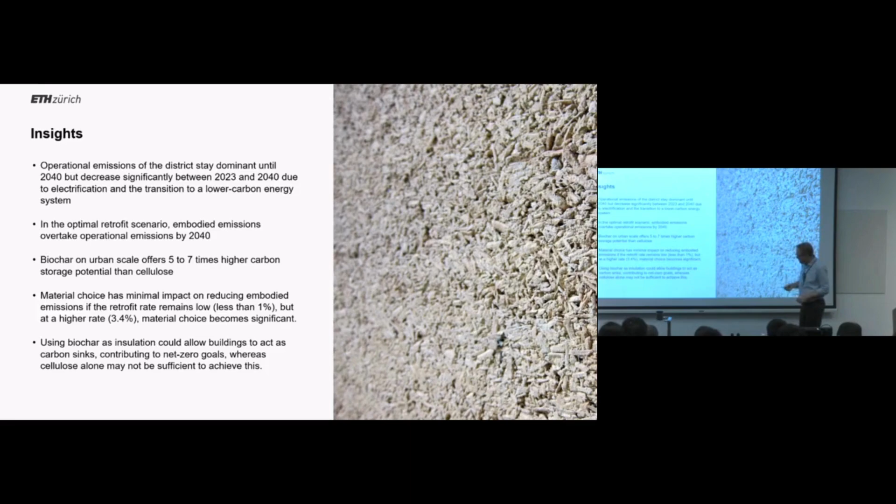Okay, I want to quickly wrap up—I'm already taking over time, apologies for that. But just at the very end, on the process, the last part: what are ideas for how to fuse this into decision making?

One important tool I already mentioned, I just quickly want to show it here, is this modeling, this open source modeling framework. This has been in development for 10 years, and it's now used in 62 countries in very different projects. Everyone can basically download it. The whole idea was to make this accessible and available to as many stakeholders as possible, so we reduce the amount of input data that is necessary.

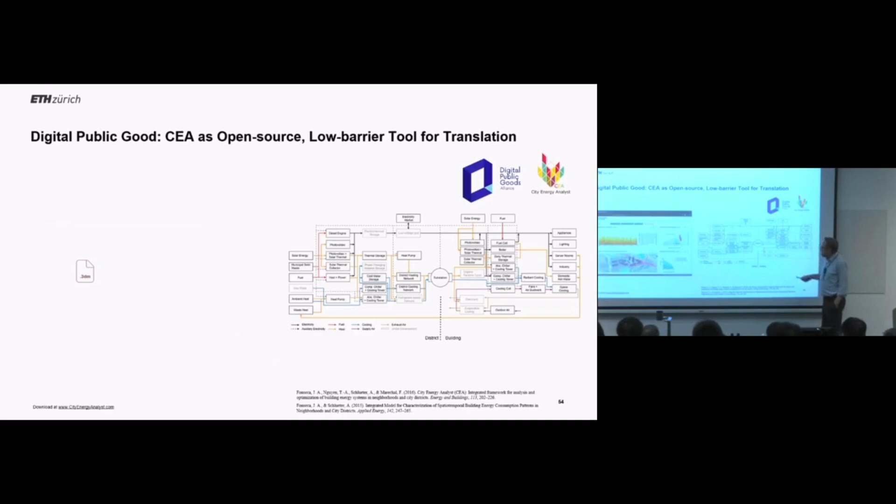Under the hood there's a big bunch of models—models of systems, for example building systems, but also larger scale systems. So physical models that simplify the systems at play. And of course there's a lot of information that is context specific, like grid emissions, for example, or carbon content of materials. But yeah, it can be used for these types of exercises.

What we try to replicate in this tool—I'm not going through all of it—is basically the process I've been talking about. You actually use it along this process: you start by creating scenarios where you have a lot of input data to collect, then you forecast demands, think about energy potentials, which gives you the energy balance idea. Then you think about supply networks that can be planned, and at the end it can be optimized for different objectives, for example energy consumption or other elements.

What we did in this is connect it to different other simulation tools—for example, transportation with MatSim, which is a transportation mobility planning tool, Calliope, which is energy hubs, Nexus-e, which is a grid scale simulation, and then ENVI-met as a microclimatic model.

The whole tool is also core in different other programs. Cooling Singapore, for example, uses the City Energy Analyst as the energy core, and other endeavors use this tool as a core that happens behind, and this is also nice. People just put this into their own tools and build up on it.

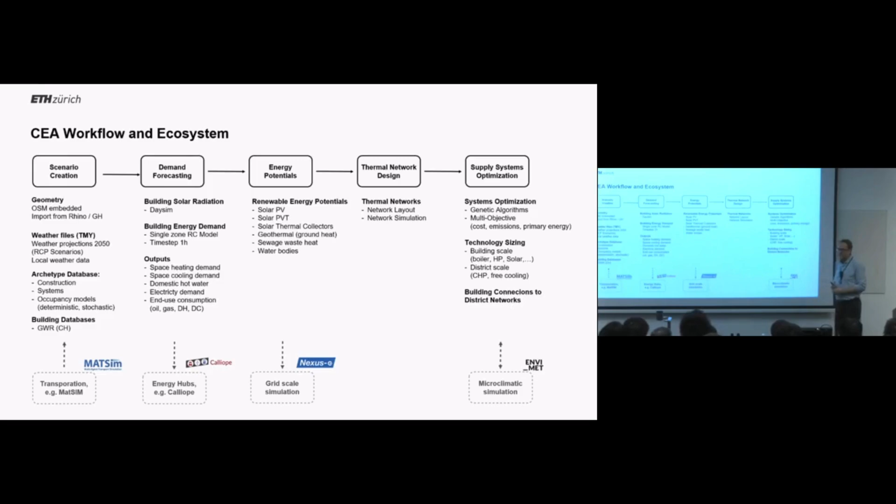But of course, this is still kind of classical modeling, and we also think about methods to speed this up. For example, using machine learning, one big challenge is how do I actually build those archetypes? How do I represent the city with only a few representatives? This is very challenging because the data comes from very different categories and domains: numerical data like building age or U values of construction, and categorical data like use type, is this an office or a residential building. So it's multimodal data that I need to use to build up representatives.

How this is normally done, and how we did it in the past, is to say, I think this is a residential building, and I add some parameters that make it residential. But is this really representative? So an exciting avenue we're currently exploring is using unsupervised learning, clustering, taking into account data from different modes, categorical and numerical, to build up building clusters. We see that a city such as Zurich can pretty nicely be defined by 9 different clusters that are representative of the building stock.

Of course, these are all combinations of very different parameters. If you look into the clusters from the perspective of non-residential users, you see some clusters that are almost purely residential, with other aspects like heat generation system being very decisive for different use types. So use types still seem dominant, but other factors such as building form or heating system also play into this entire equation.

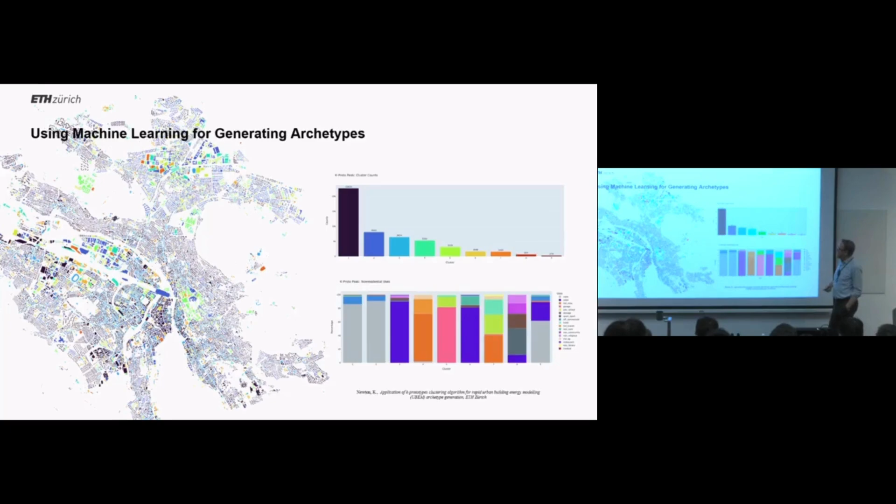So this is how we hope that for each city we can actually very quickly create a suitable set of archetypes that represents the city and can be used for this type of modeling.

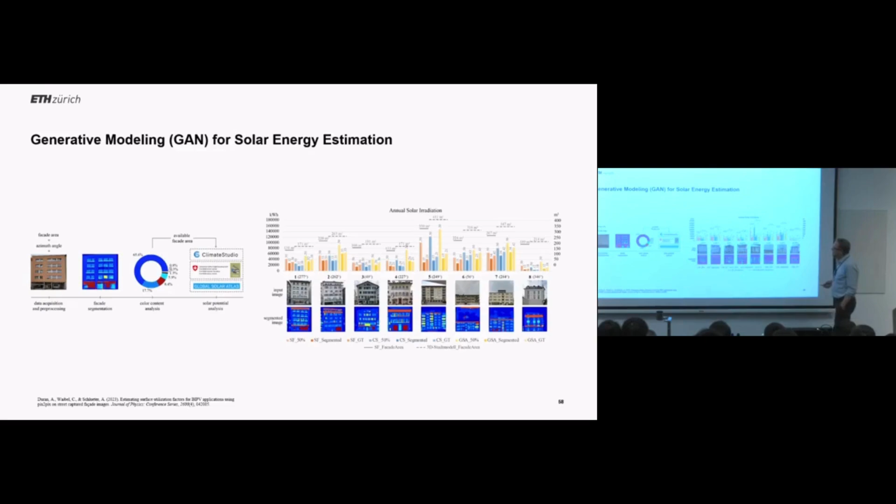Another exciting avenue is to do it without models entirely, and a lot of you are working on this. So the question is, how can I use other techniques, like image data, to generate the amount of solar potential? There's very nice work in our group looking at how machine learning can identify suitable areas for photovoltaic placement without a model, just from a picture. She's developed a very nice workflow that works quite well and compares really well to the ground truth. So instead of modeling everything in high detail, there can be methods that extract this almost automatically from available image data, something very data-based and data-driven.

These interactions help us understand what we should do. We have to change how we do this. It needs to be iterative, it needs to be in feedback loops, and we have to use this type of analytics for evidence in the end.

Computational tools and methods can help, and we're just at the very beginning. Think about all the methods of artificial intelligence, there's a lot more to come. It will be very, very interesting.

I strongly believe we have to always look into design for qualities and quantities, so this can only be complementary. With these techniques, I still hope and am confident that we can design towards a positive building future, an urban future, and these tools and approaches might help us on the way. Thank you very much.